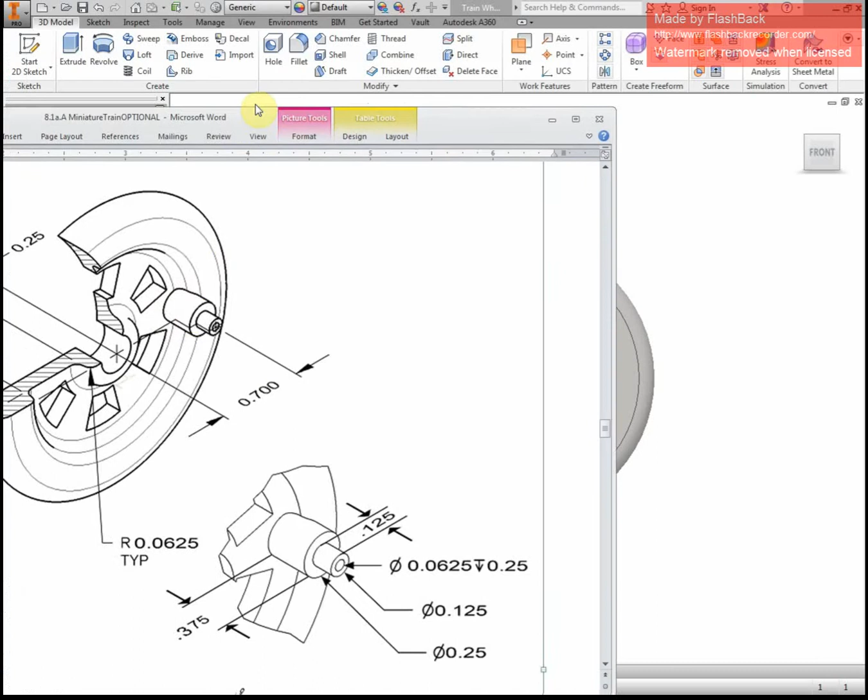Keep in mind though when you're doing this that we are supposed to be 15 degrees off of our cutouts. The reason that's important is that it is right in the middle of them, not on one or off one, and weird things happen where some stuff's being cut out, and our peg is kind of dangling off in the middle. So we want to be smack dab in the middle, or 15 degrees off.

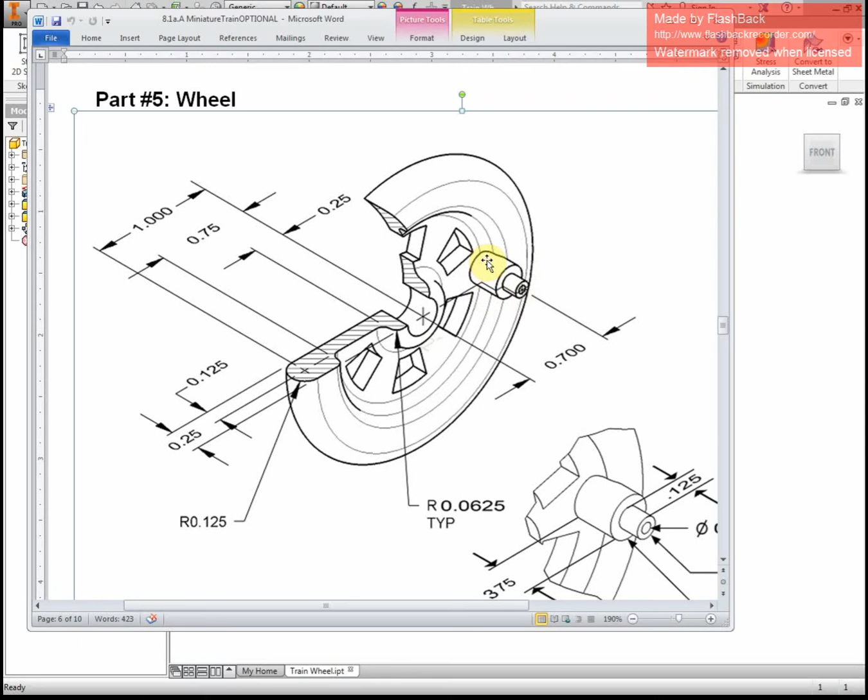So just so you're aware, we're going to start by building the larger cylinder, then building the smaller cylinder, and then we're going to put a hole in it. That's just the general layout for how we're going to build it.

So I'm going to start a sketch right here. I now need to make a line so that I have my angle correct, starting in my origin, coming out. I'm going to hit tab so I can adjust my angle to 15 degrees. Press tab again, so now I'm adjusting the length, and I want to come out, according to my directions, 0.7. Now that line is there, I want to hit escape so I'm done doing lines.

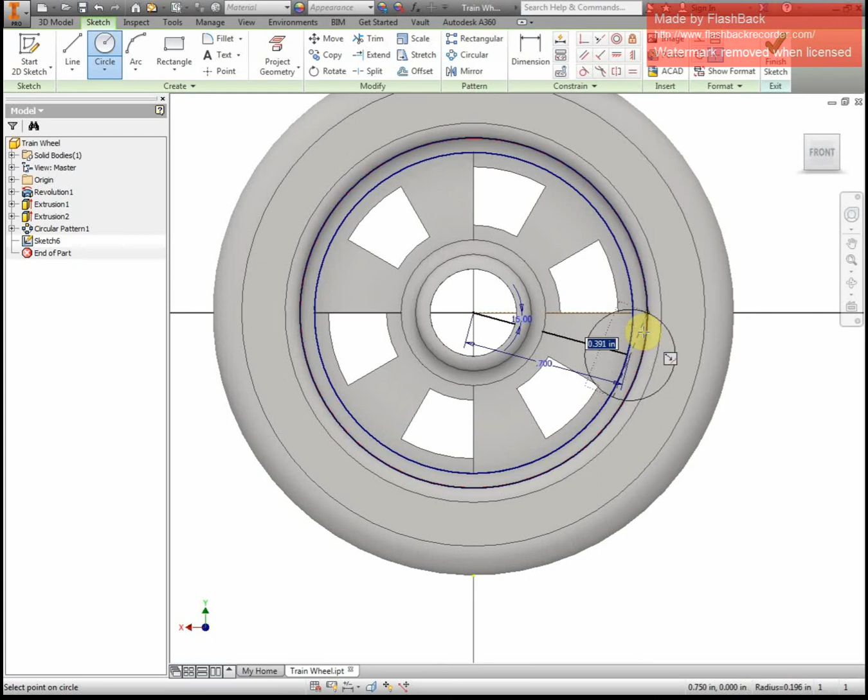Now I'm going to put a circle on the end of that line. The whole point of that line was just to give me the proper angle and the proper location for the center of my circle, and my diameter here is 0.25. Hit enter. Beautiful. If you notice, it does cut out a little bit right here. That's fine, perfectly fine. That's actually what we want, that's where it is on our regular shape.

So I extrude. I'm supposed to come out 0.375. Enter. Now I can just build on top of that.

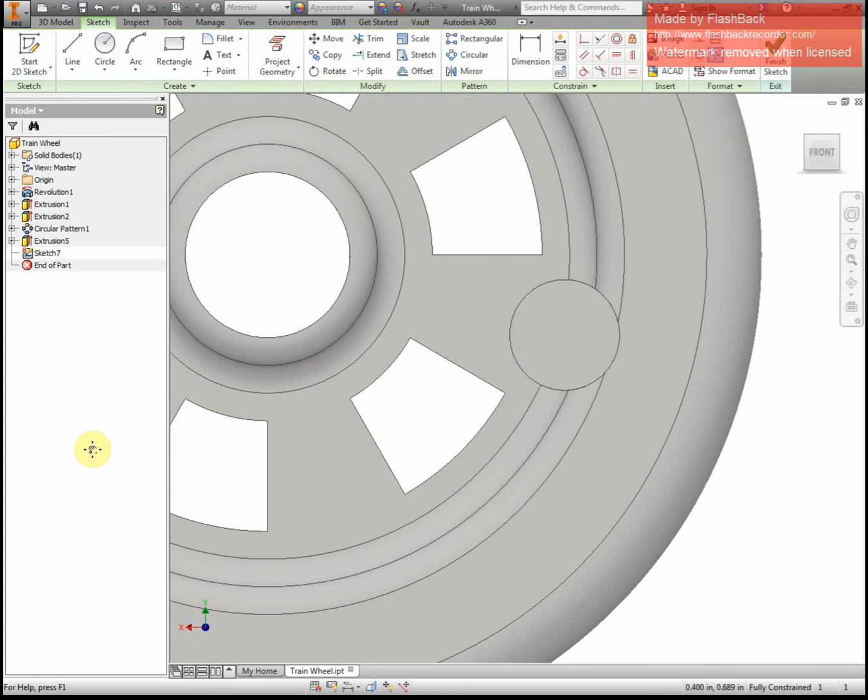I want my next circle to have a diameter of 0.125, and that is extruded out 0.125.

Looking pretty good. Now I have to put a hole on it, so I'm going to use the 3D model tab, hole. In this case, I could do a circle and extrude it in, but I'm going to be fancy and make a hole here.

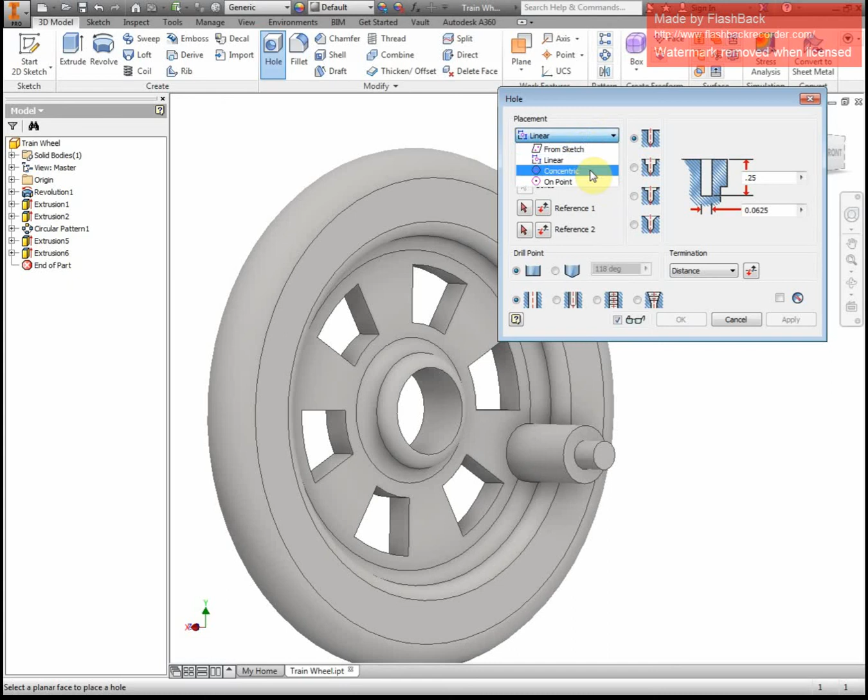I'm going to make sure it's concentric so that it's smack dab in the middle of my peg. I have to choose my plane first, and then the concentric reference. Now you'll notice it's right in the middle. I first had to click and choose the plane, which was this big face here. Then the concentric reference could be really any circle on the little peg.

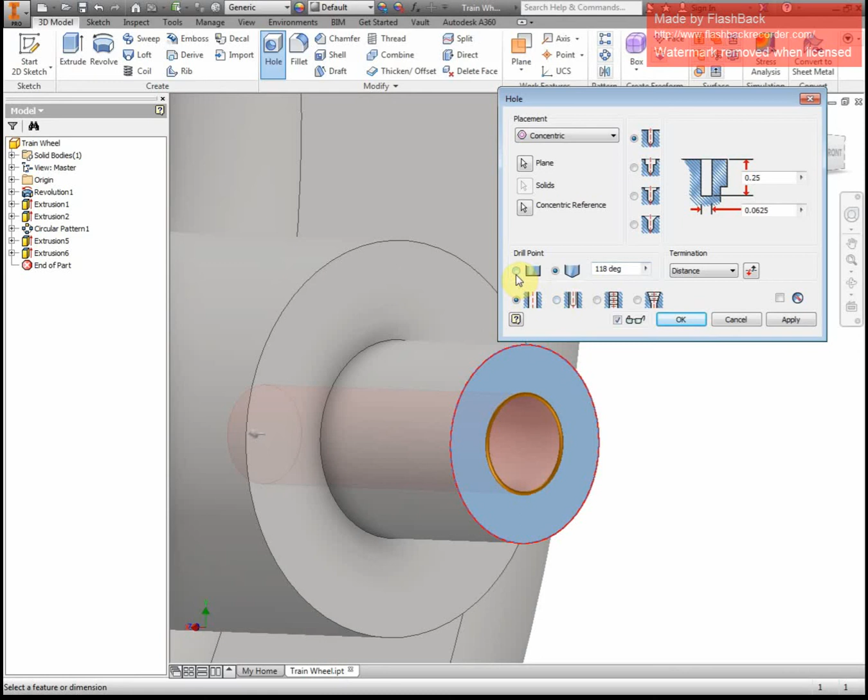Now I have to change my diameter. This one might be correct already. My diameter has to be... oh sorry, this is depth. It has to be 0.25, and my diameter is 0.0625. I changed it earlier, it was a cone on the bottom, or a beveled drill bit, and this I'm going to change to flat just for funsies so you guys can see what that looks like.

Alright, and hit OK. And look at that, peg is on there. That's as simple as it gets, folks.

If you'll notice, it looks like our wheel is turned just a little bit clockwise. The reason being, when we built these cutouts, we built this one on our x-axis, when essentially that line we put in was supposed to be on our x-axis. So everything's turned about 15 degrees clockwise, or negative 15 degrees. But that's fine, that's no big deal, our wheel is just a little moved. And when we go to assemble everything, that should all sort itself out once we put our little arms on.